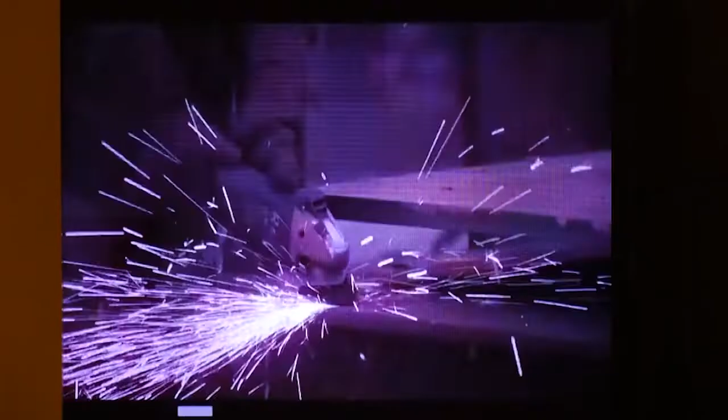Ladies and gentlemen, a very good afternoon to all of you. At the outset, I'd like to express our sincere thanks and gratitude to the management of NHAI and the organizers of this conference for having given us this opportunity to showcase the construction of Bogibeel Bridge, which has been done by HCC over the mighty river Brahmaputra.

Now, as the name signifies, the Brahmaputra, the male river, is ferocious. It is known for its fury, its turbulence, and its floods. In the first session, we saw a devastating video of a flood caused in the Barak River. But to tell the truth, the Brahmaputra is no less than 10 times more furious than the Barak. The design flood at the location where the Bogibeel Bridge has been constructed is estimated to be about 45,000 cubic.

But the question might come that, yes, in the river Ganges in Kolkata, the design flood is somewhere close to 70,000, which has also been observed. Then in what way can the Brahmaputra be considered more ferocious compared to the Ganges? If you see the hydrograph of the Brahmaputra, particularly at the bridge location, you will find that the rising limb lasts hardly 5 hours, whereas for the Ganges it lasts for a period of 12 hours. That indicates the steepness of the rise in the flood.

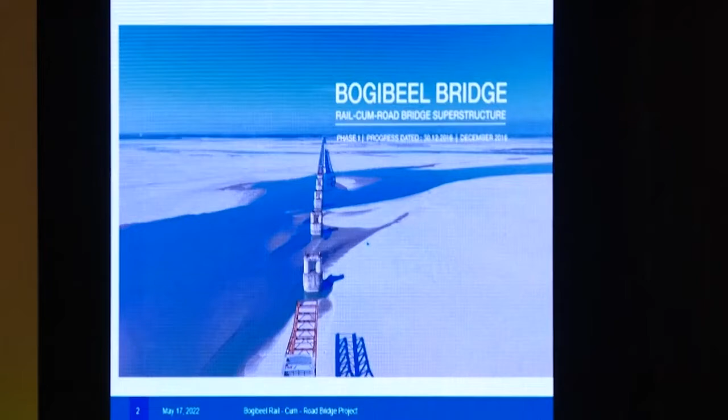At this point of time, I would like to place on record the support and cooperation that we have received from all corners, particularly the Indian Railway, in overcoming all technical and other issues to complete the project in the manner it was expected to be completed. This bridge is special in the sense that it's the first of its kind in India.

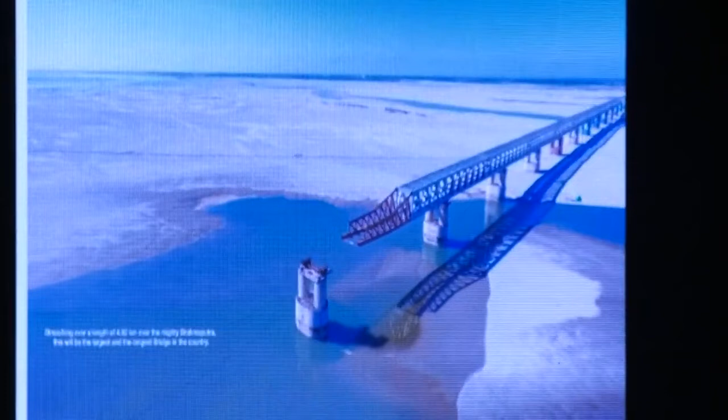It's totally a welded bridge, composite bridge, steel and concrete, and particularly the area receives a lot of rainfall, and therefore the extent of corrosion is likely to be severe. So in order to protect the bridge, to ensure the bridge lives for the design lifetime, corrosion protection measures have to be applied. For this, a special kind of steel with copper bearing had to be employed, apart from other protective measures.

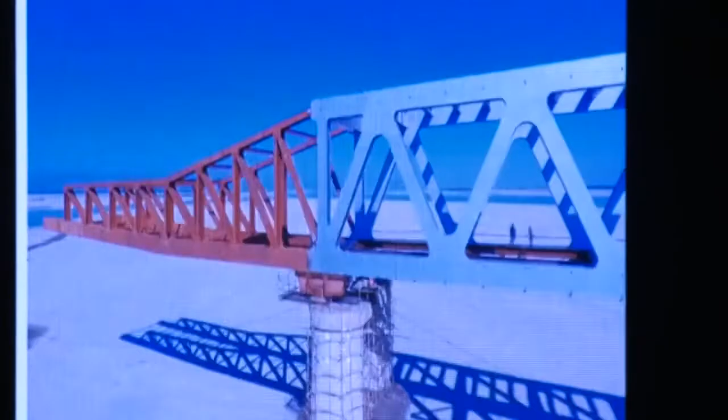Our program of construction was further compounded due to the short working season in the northeastern part of the country, with rains for more than 5 months. Secondly, this area was not having proper infrastructure, it was lacking proper communication, and that was another bottleneck for us to achieve the desired progress.

So the video has already been shown. This is another video which will showcase the method of construction that was used in this process. After completion of this video, I proceed with the presentation.

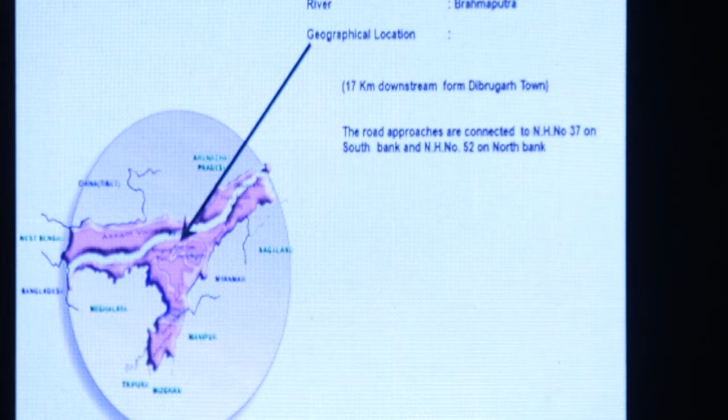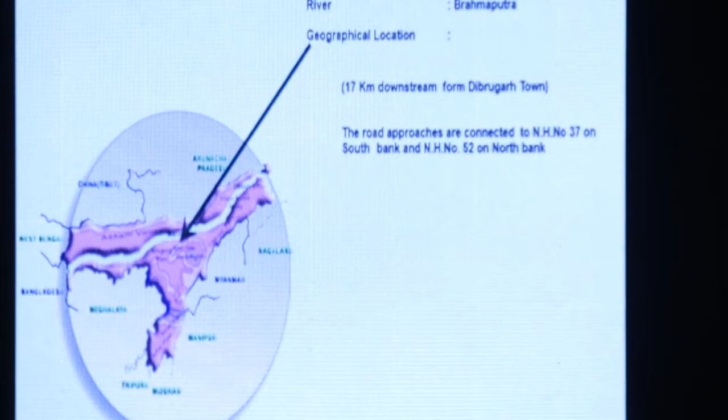Regarding the project location, it is located in the district of Dibrugarh in the state. Yeah, it's already completed and made operational. It's located in the district of Dibrugarh in Assam, at about 17 kilometers downstream of the town, which is about 440 kilometers from the capital city Guwahati.

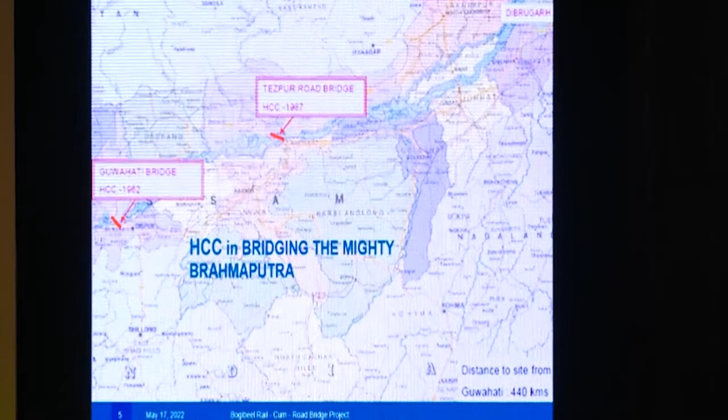Until construction of this bridge, the Brahmaputra River was bridged at 4 locations. 2 bridges were constructed in Guwahati in the name of Saraighat Setu. The second one was Tezpur Road Bridge, which was constructed by HCC in 1987. Then the uppermost bridge is the Bogibeel Bridge. So out of the 5 bridges that have been constructed on this river, 3 have been constructed by HCC, and I take that pride in saying that HCC has been pioneering in bridging Brahmaputra, particularly in the part of Assam.

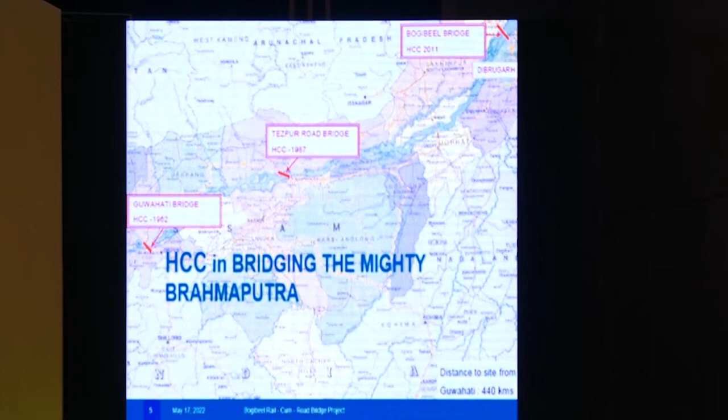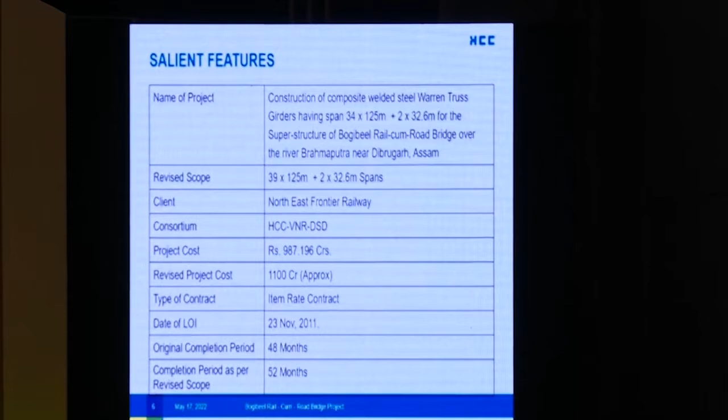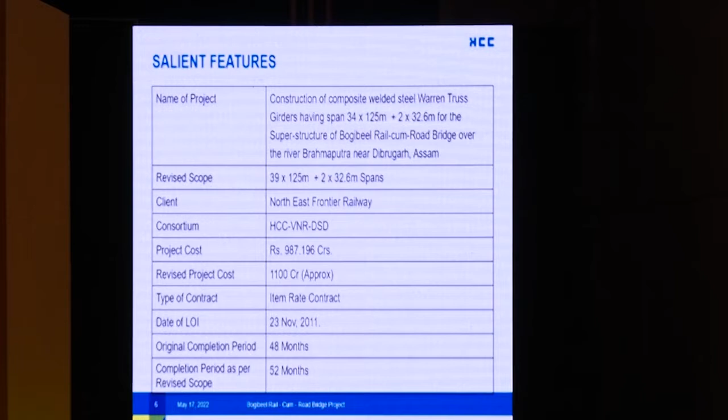Regarding the salient features, the project comprised of providing the superstructures comprising of an original scope of 34 spans of 125 meter each, along with 2 numbers of abutment spans of 32.6 meter. But since the DPR was prepared, the river, because of its immense erosive potential, increased in width, requiring revision in the scope. So 34 spans had to be increased to 39 spans, keeping the span length same as 125 meter.

The client was Northeast Frontier Railway. The work was awarded to HCC, VNR, DSD Consortium at a project cost of 987.196 crores. But because of increase in the span, the revised project cost was estimated to be 1100 crores approximately. The type of contract was an item rate contract. Date of LOI, that is letter of intent, was 23rd of November 2011, with the original completion period of 48 months. But because of increase in the scope of the work, the completion period was extended by another 4 months, that is to 52 months.

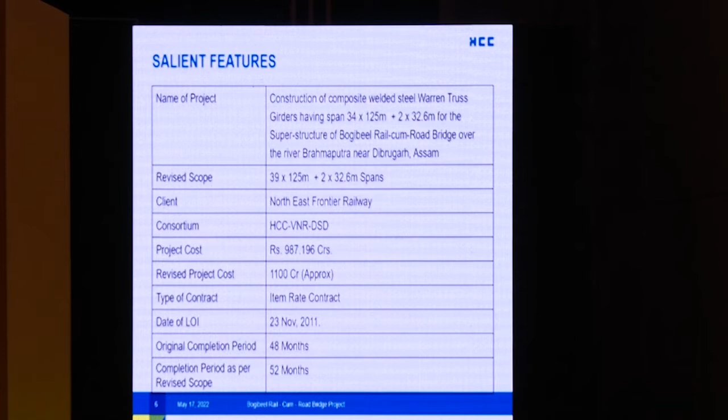The overall length of the bridge was originally estimated to be 4.315 kilometer, and the revised length is 4.94 kilometer. The span arrangement I have already said. The type of superstructure was a composite welded Warren truss girder with road deck at top chord and rail at bottom deck. So this is a bridge of first of its kind in India, a bridge with rail and road constructed over Brahmaputra.

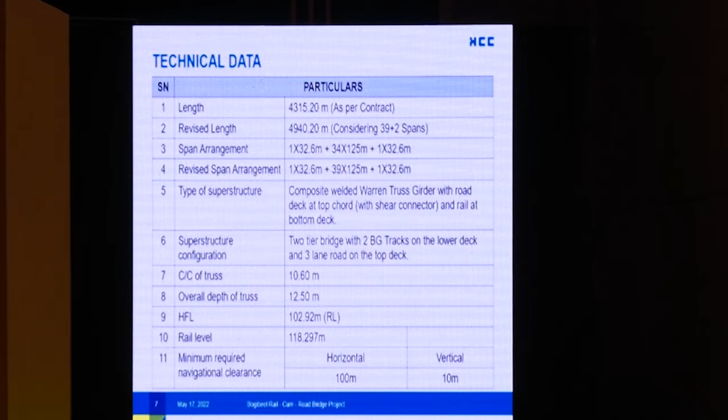The superstructure configuration was a 2-tier bridge with 2 BG tracks on the lower deck and 3-lane road on the top deck. The center to center of the truss was 10.6 meter apart. Overall depth of the truss was 12.5 meter. The HFL at the bridge location was 102.92 meter. As per requirement of navigation clearance, a vertical gap of 10 meter and a horizontal gap of 100 meter is to be maintained. And we have maintained a vertical gap of 15.7 meter, and in place of 100 meter, the span length was given as 125 meters, so well meeting the navigation requirement.

This Bogibeel Bridge project, as I said, is the first time in India of a total welded steel truss girder. India's longest rail-cum-road bridge project. First time in India that Eurocode was followed for bridge construction activities. And first time in India, incremental launching was adopted for such a long bridge. And first time in India, a bridge inspection trolley has been used for future inspection and maintenance.

Now, on the timelines of this project, in the year 1985, the famous Assam Accord was signed between the then Honorable Prime Minister of India, Rajiv Gandhi, and the All Assam Students Union, and the project was approved by the Planning Commission. In the year 1997, the project was sanctioned and the feasibility studies were undertaken by Government of India, followed in 2002 by the foundation stone laid by the Honorable Prime Minister Sri Atal Bihari Vajpayee, and the work commenced. In the year 2007, it was declared a national project.

In the following year, the substructure work commenced. The substructure work was awarded to Messrs. Gammon India Limited. In 2009, the southbank work got completed, followed by completion of the northbank work in the year 2010. And in 2012, after award of LOI to HCC, the superstructure work commenced, and in the year 2014, the first girder was placed.

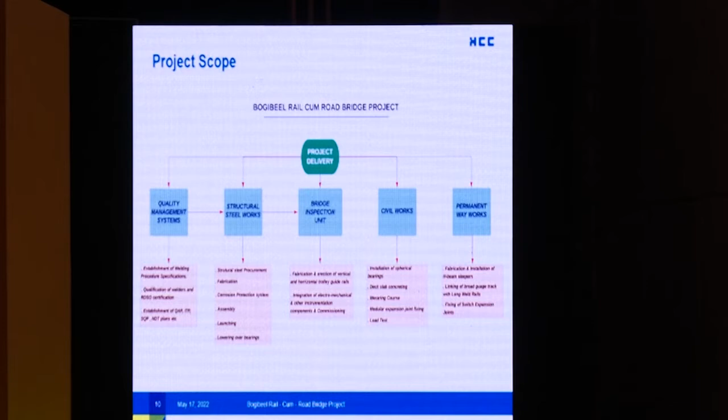Regarding this anti-seismic arrangement, I must tell you that this falls within seismic zone 5 of the Indian seismological map. Therefore, it calls for the design to sustain a value of nothing less than 7.0 on the Richter scale. And this project has been designed for a Richter scale value of 7.2.

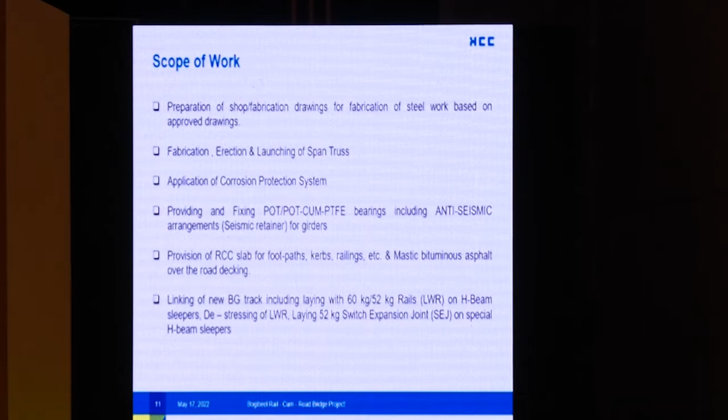Then provision of RCC slab for footpaths, curbs, railings, and mastic bituminous asphalt over the road decking, and linking of new BG track, including laying of 60 kg by 52 kg rails, which are long welded rails on H-beam sleepers, destressing of LWR, laying 52 kg switch expansion joint on special H-beam sleepers.

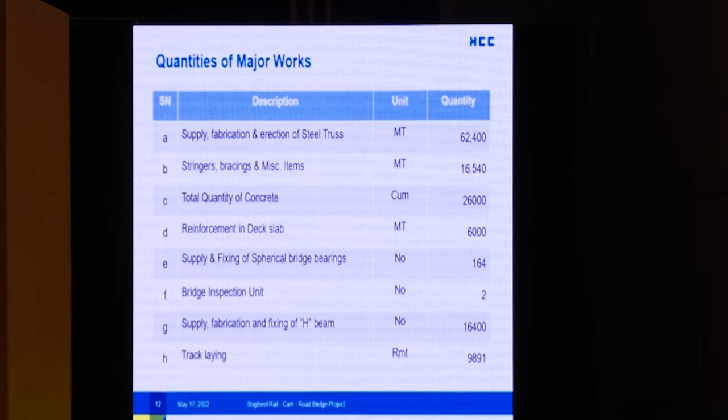Now, quantity of major works: basically it is a steel bridge. So you may see that the bridge involved about 62,400 of supply, fabrication and erection of steel trusses, then stringers, bracings and other miscellaneous items accounted for 16,540. So in totality, this is giving about 80,000 of steel material to be handled for the project.

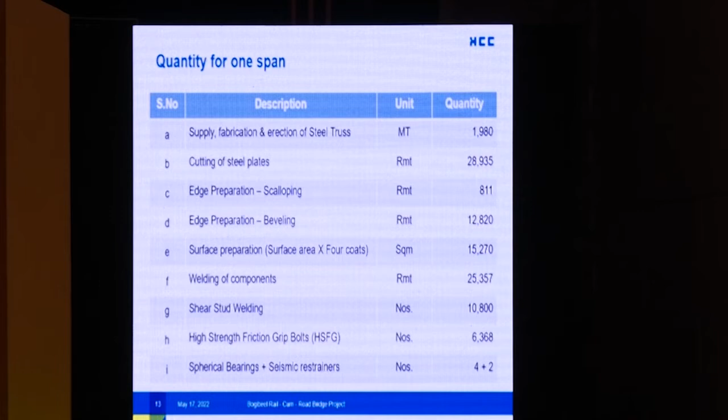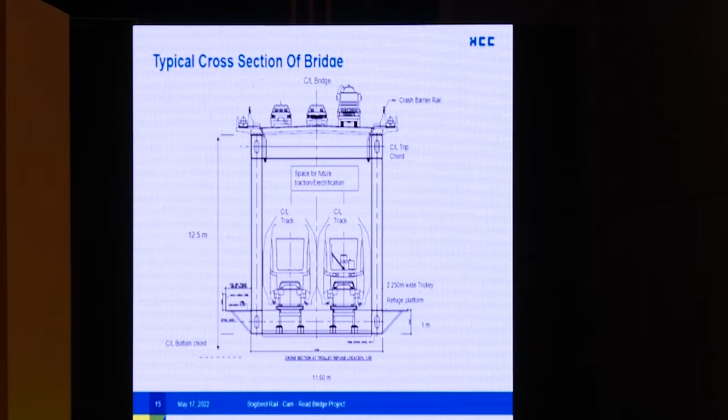And the typical cross section of the bridge, you may see that the bottom width is 11.6 meter and the top height is 12.5 meter. The major equipment which were deployed for fabrication purpose are 4 overhead gantry cranes of 20 ton capacity, deployed at 2 different bays in the fabrication workshop.

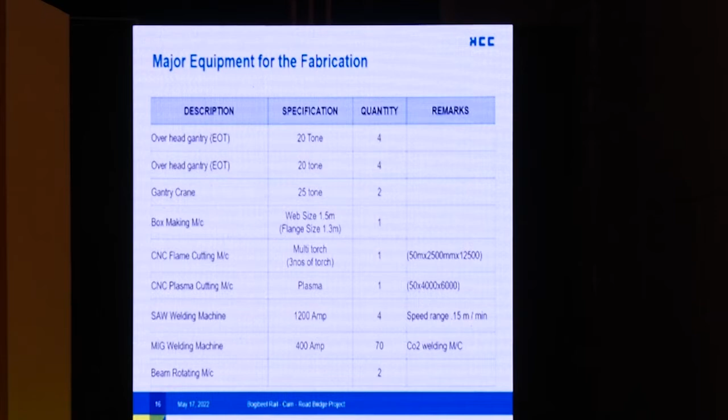Quantities were 8 numbers, and 2 numbers of 25 ton gantry cranes were deployed, apart from other machineries like box making machine, CNC flame cutting machine, CNC plasma cutting machine, then submerged arc welding machine, then metal inert gas welding machine, beam rotating machine, etc. So these are all other equipments which had to be incorporated in the process.

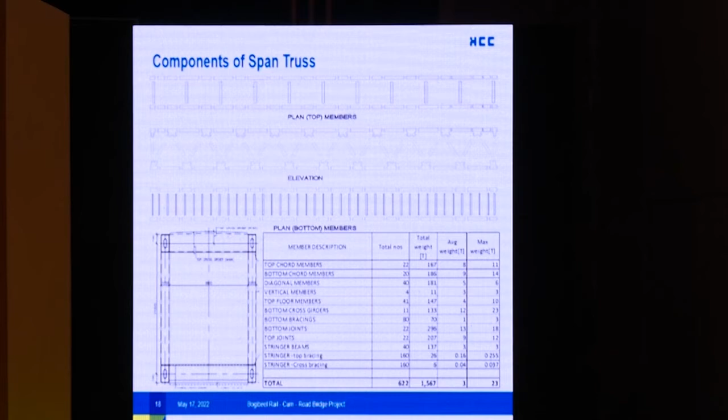Now regarding the components of the span truss, you'll see that it comprises of top chord members, bottom chord members, diagonal members, vertical members, top floor members, again bottom cross girders, bottom cross bracings, bottom cross joints, top joints, stringers, and stringer cross bracings. So this is fabrication of component.

The first one is the top chord and bottom chord members are box sections with box dimension of 1 meter by 1.5 meter. And total contribution of this box into the entire assembly is about 21%. Then diagonals and vertical members are also box sections with box dimension of 1.1 meter by 1 meter, and they accounted for 11% of the total tonnage.

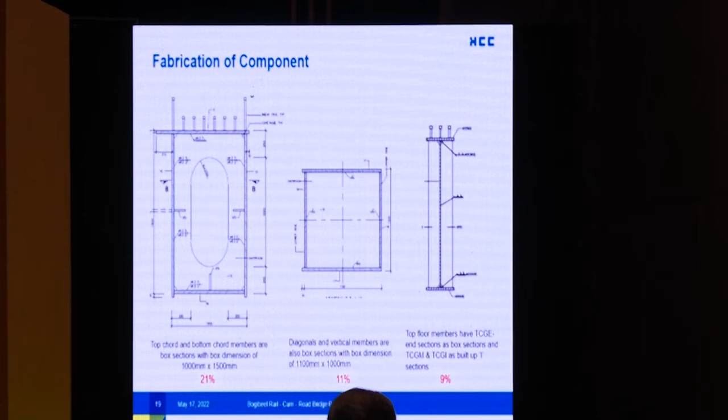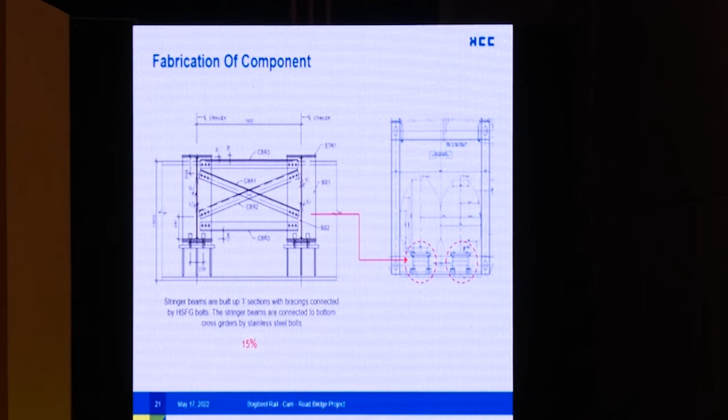So we had developed a fabrication workshop just near to the site. Before I go into this, I must tell you some background. Initially, when the project was awarded to HCC, the planning was that work will be continued from 2 different banks of the river, that is from the north bank and from the south bank. And that would require us handling of 5 trusses at a time through 1 train, which would require us to handle about 8,500 MT of steel materials.

But then when we had taken the recce after award of work, we have seen that these 2 banks are so distantly connected with each other that we will be required to move about 350 kilometers to reach the other bank unless we use a ferry. So that would require us to set up two independent units, and these are to be viewed as two independent projects.

But then the time period was very short, so we started thinking what best can be done. So literature reviews were done, a lot of research activities were taken up, and then we could come to know that there are some bridges in China and some bridges in Germany which have been built with handling of more than 15,000 MT of steel. So that had given us some idea: why can't we bring that technology to India and handle, say, 10 trusses at a time, 10 spans at a time, which would require handling of 17,000 tons of steel.

So our people, along with officers from Indian Railways and other consultants, had gone to Germany, tried to gather information, tried to visit the bridges which have been built with such a massive involvement of steel at a time, and the technology was transferred. And that is how ultimately it was decided that we shall be taking up the work only from one bank rather than concentrating on two banks. And that had required a massive handling of 17,000 tons of steel per train at a time.

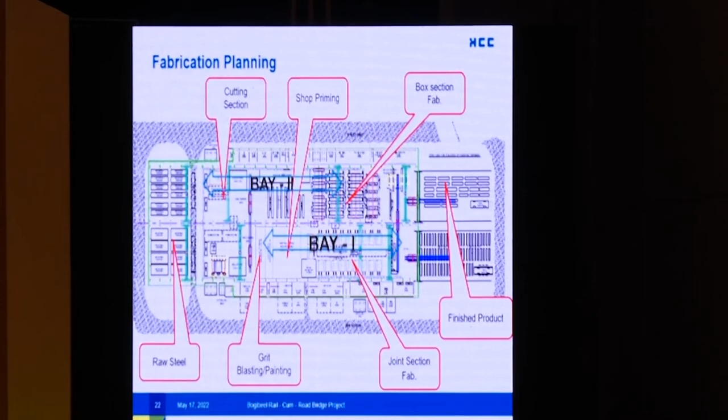So for that, the fabrication planning had to be very robust. So we had set up two bays, bay number 1 and bay number 2, to handle all these activities. This gives you a layout of our fabrication workshop. You'll see that both the bays have been marked. So here the activities are basically receipt of raw steel, followed by cutting section, then box fabrication, joint section fabrication, then grit blasting, painting, and shop priming, after which the materials were made ready as a finished product, ready for transportation and to be placed at site.

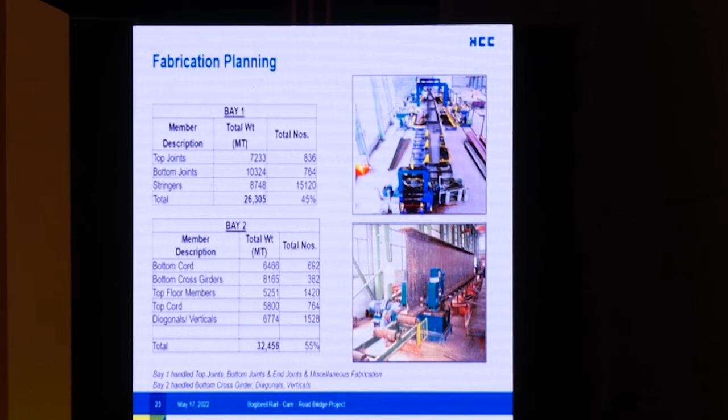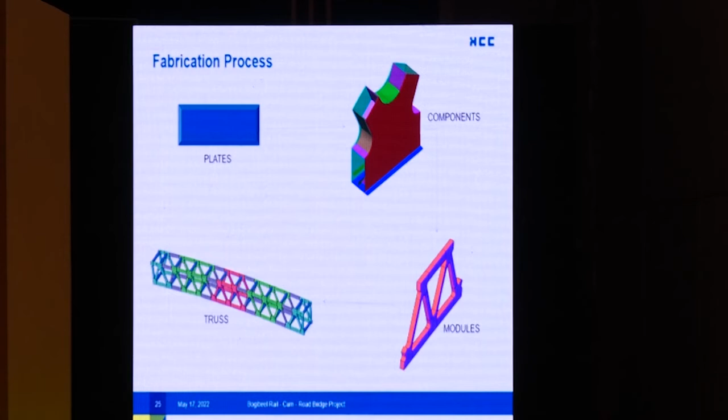So regarding fabrication planning, you'll see that in Bay 1 we handled about 26,305 MT of steel materials, which accounted for 45% of the total requirement, while in Bay 2 we handled about 32,456, so totaling about 58,000 MT of steel, which were managed from this workshop. So this is a flowchart of fabrication which is known to each and everyone. This is a standard process. We did not do anything special in this. The fabrication process is basically receipt of plates, then making the components, then making the modules, and these modules are assembled together to form the truss. That is how the system was continued.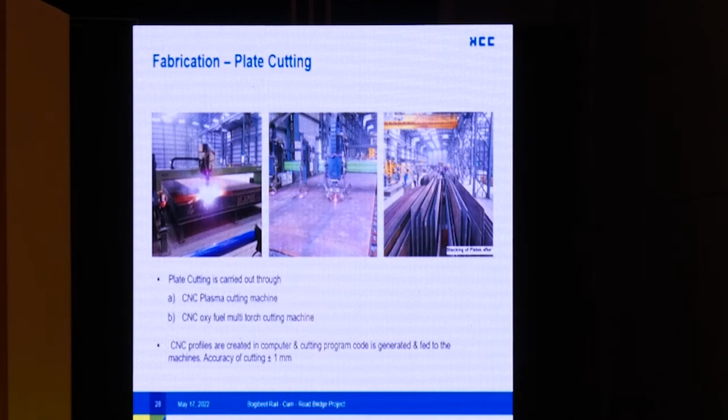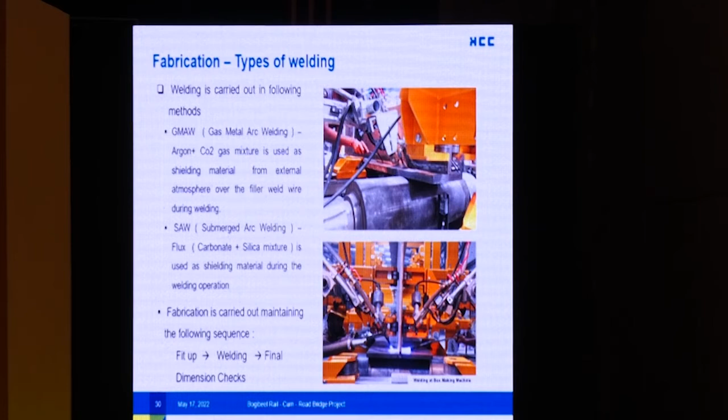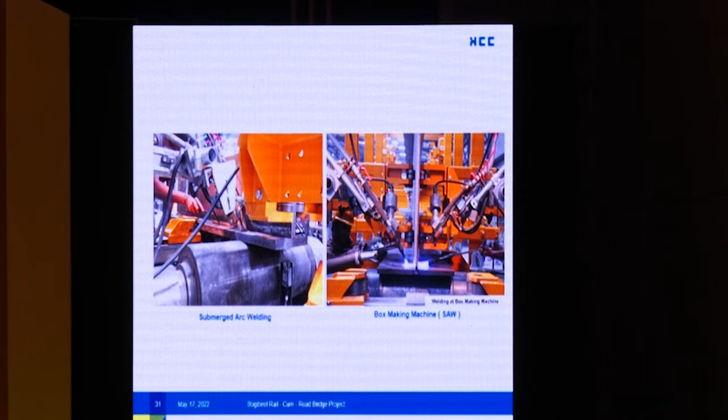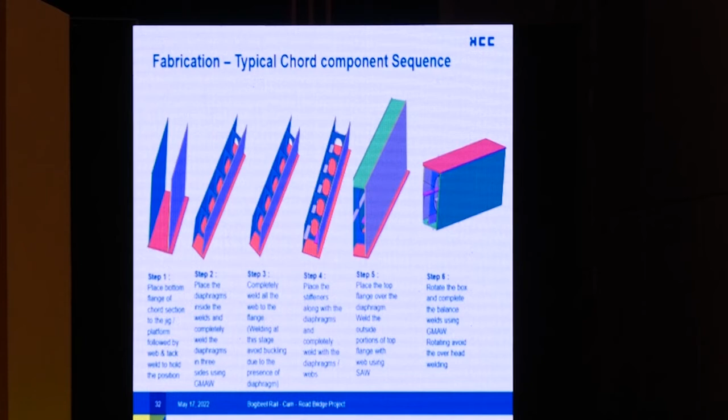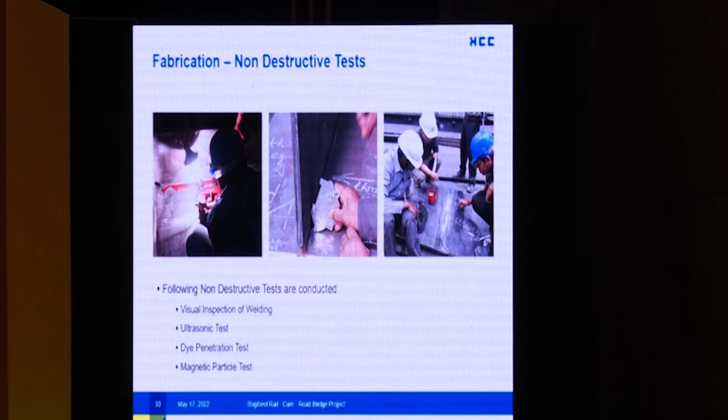And welding was carried out by the following methods: one is GMAW, that is gas metal arc welding, and another is submerged arc welding. And fabrication was carried out maintaining the following sequence: fit up, welding, then final dimension checks. This is a view of submerged arc welding being done, and the box making machine. So this is a typical procedure that we followed during the fabrication process. Non-destructive tests were carried out to ascertain that the welding done is up to the mark and meets the specification without leaving any gaps or cracks, which might create problems during the maintenance period as well as during the assembling period.

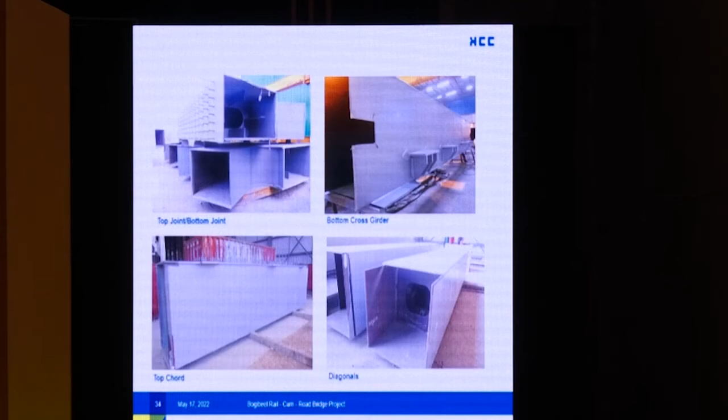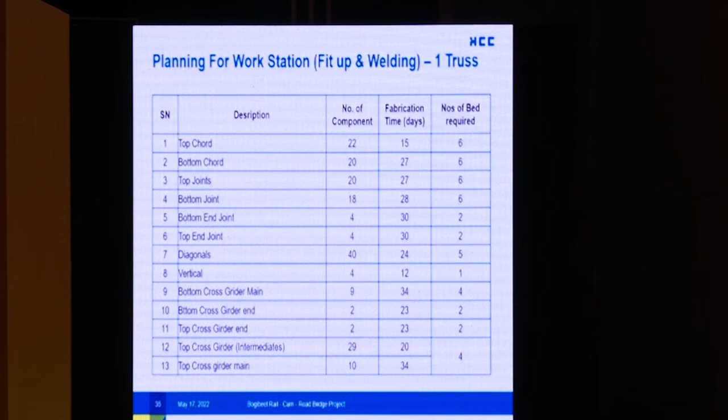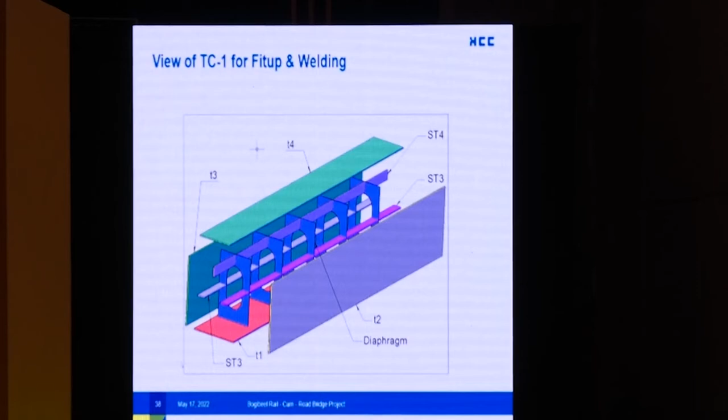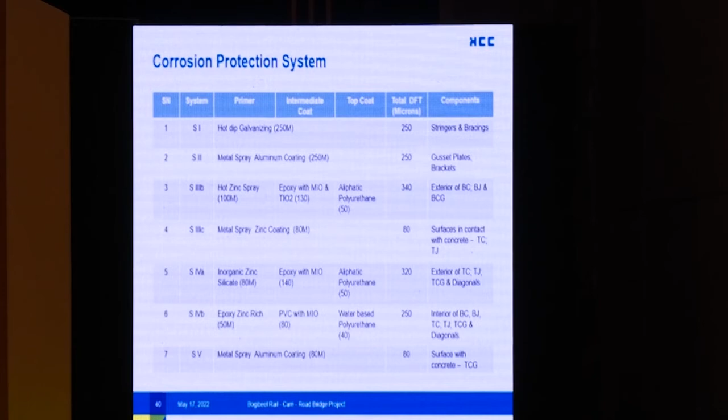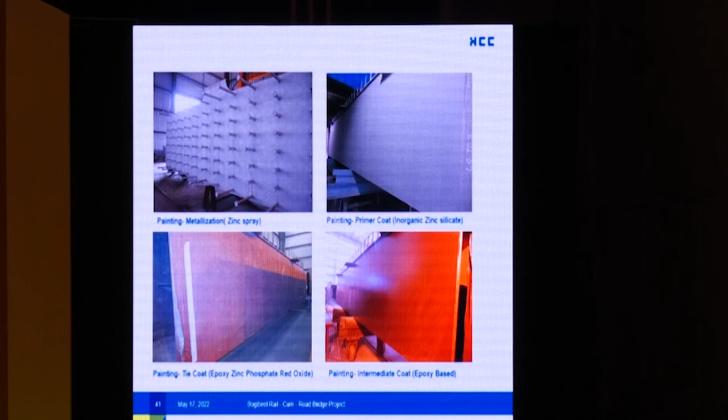The corrosion protection system: as I said, this area falls in the severe corrosion zone, which requires that a proper corrosion protection system has to be applied. So there are about 7 different processes that have to be applied in order to make it anti-corrosive, so that the design life can be assured. And as a matter of fact, the project has been running, and corrosion damage has been observed and measured, and it has been found very, very satisfactory.

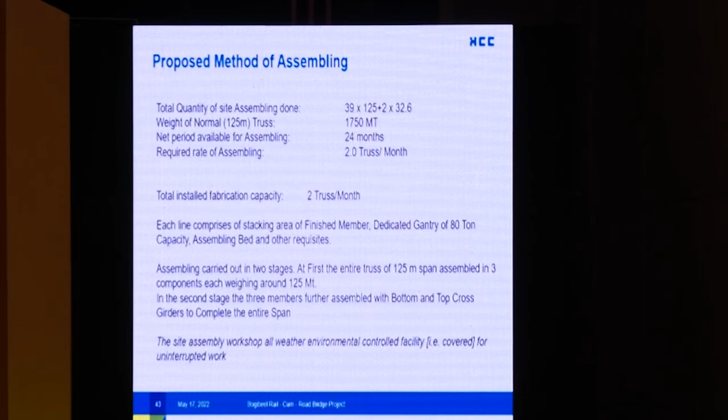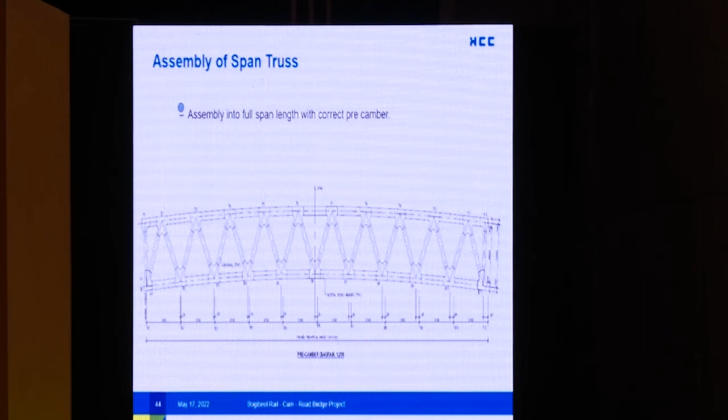Then the proposed method of assembling: it required basically 39 spans of 125 meters and 2 abutment spans of 32.6 meters, and the weight of a normal 125 meter truss was about 1750 MT, and the net period available for assembling was 24 months, which means the required rate of assembling was 2 trusses per month. So that was a horrendous, Herculean task, but with the help of everyone, we could come up to the expectation of Indian Railways. Then assembly of truss spans into the full span length with correct precamber. This gives you a view of this. And the proposed method of assembling, which was actually followed at site, was composed of 5 different parts, and these parts have been shown in different colors.

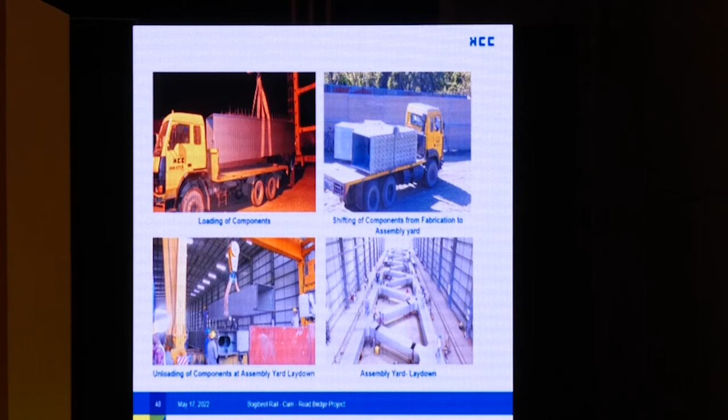So here are some of the photographs which were taken during execution of this project.

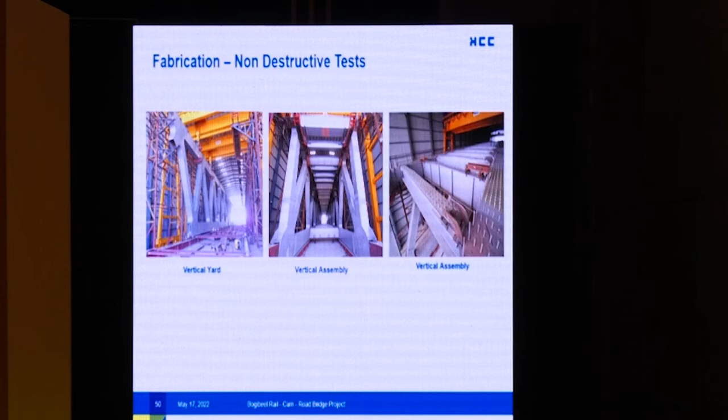Now, methodology of launching - as I said, that was the most daring challenge for us - how to handle 17,000 MT of steel at a time in a train comprising 10 different trusses.

Launching was carried out in four launching segments, truss trains. First 3 segments consist of 10 spans of 125 meters each, while the fourth consists of 9 spans of 125 meters. The first and last spans of each launching segment are end spans, while the remaining are normal spans.

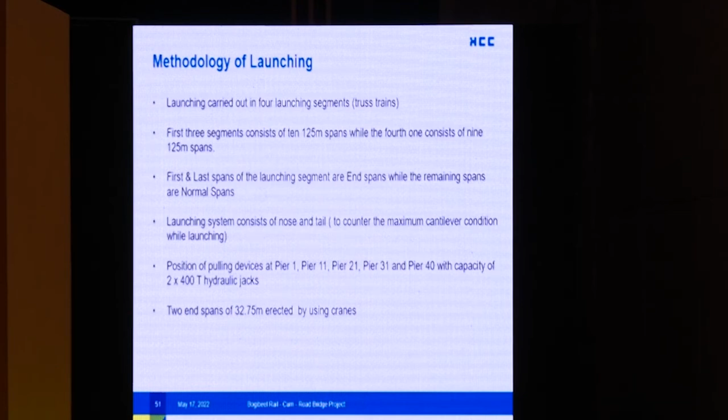Launching system consists of nose and tail to counter the maximum cantilever condition while launching. Position of pulling devices at pier number 1, pier number 11, pier number 21 and 31, and pier number 40, with capacity of 2 numbers of 400-ton hydraulic jacks. 2 end spans were also required.

So this is the launching sequence. You'll see the first sequence is of 10 spans with 125 meter length, again 10 spans of 125 meter length, and 10 spans followed by 9 spans, as I mentioned in my first slide.

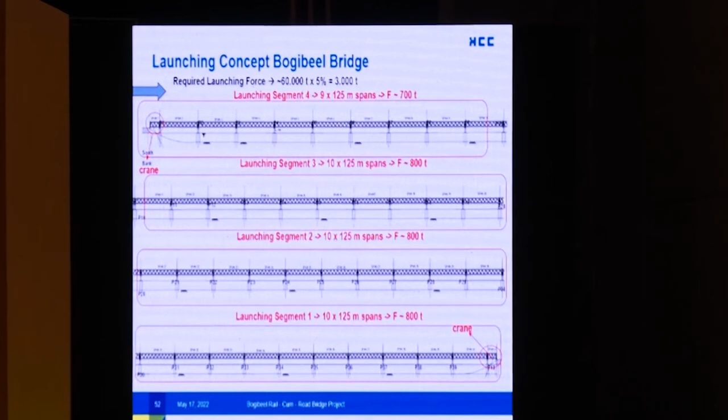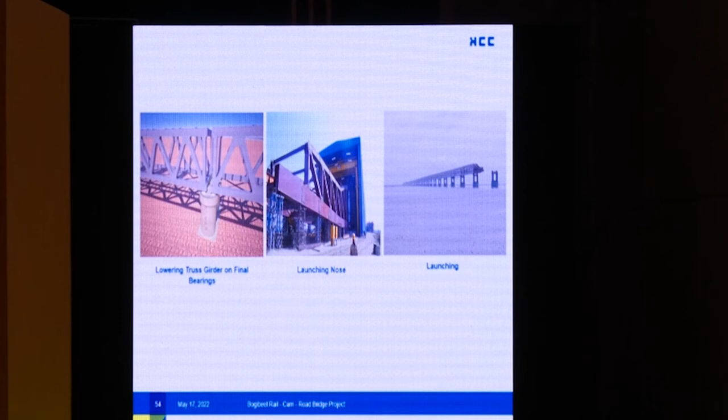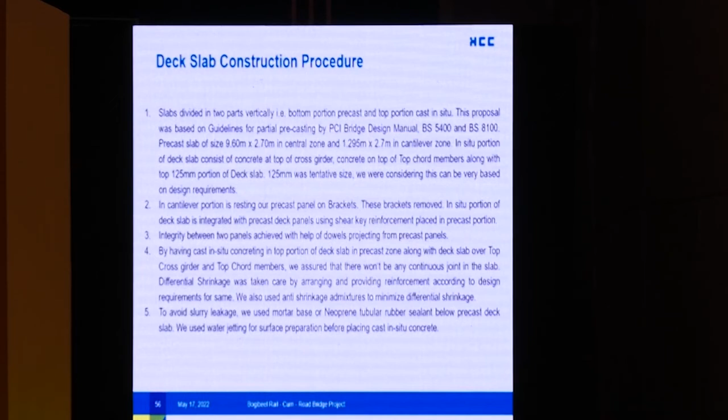Precast slab of size 9.6 meter by 2.7 meter in the central zone, and 1.295 meter by 2.7 meter in the cantilever zone. In situ portion of deck slab consists of concrete at top of cross girder and concrete on top of top chord members, along with top 125 mm portion of deck slab. 125 mm was a tentative size - we were considering this could be based on design requirements, but ultimately this is what was followed during construction.

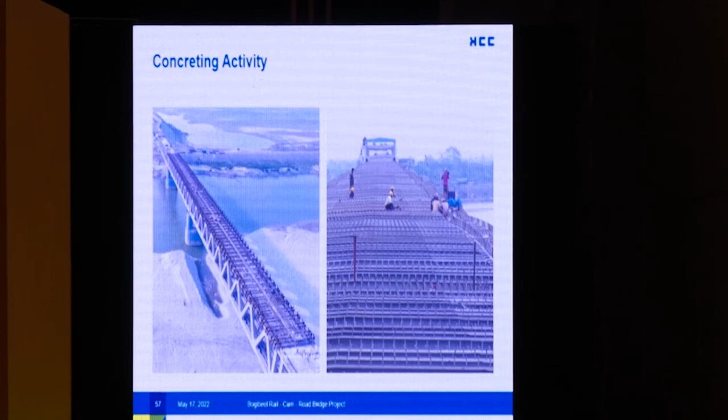Then on the concreting activity, some photographs taken during that time are placed here for your view. Then H-beam sleeper fixing of lower spans.

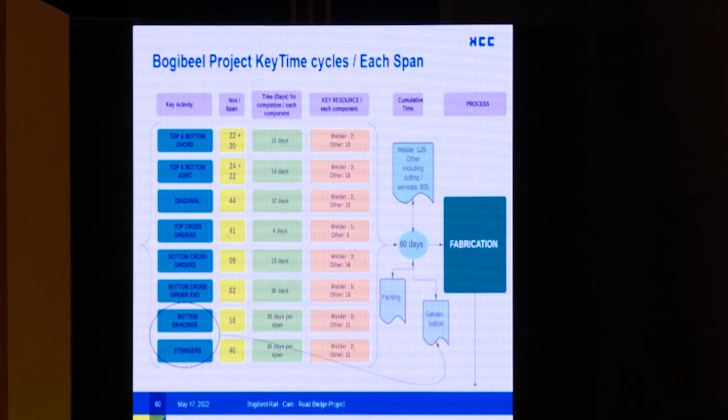Now, Bogibeel project key time cycles for each span - you'll see from this slide that the fabrication activity took about 60 days, followed by another 40 days for galvanization and other anti-corrosion measures application. And assembly took about 50 days.

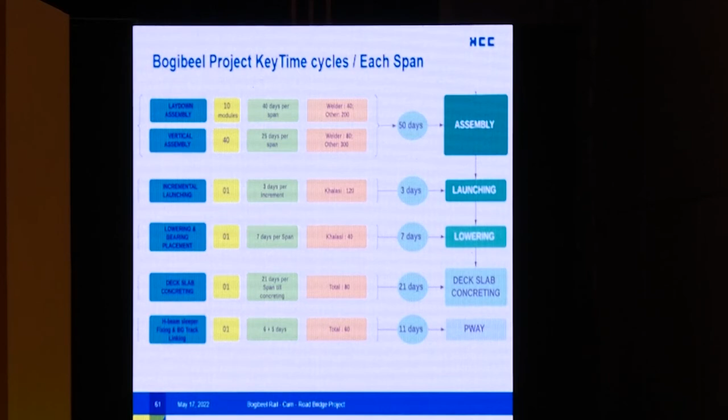But for launching, which we were afraid might take a lot of time, this work could be completed in a pretty small period - 3 days, and 7 days of lowering. So in 10 days, practically, we could lower and make it ready.

So other major technical aspects of the bridge are the bridge inspection trolley. As I said, 2 numbers of trolleys on either side of the bridge for regular inspection and maintenance have been provided. This is the first time such an arrangement has been given in any road bridge in the country.

Then spherical bearings - total about 164 numbers of spherical bearings were imported from abroad, with capacity of 29,000 kilonewton for the 125 meter span and 8,400 kilonewton for the end spans. Before commissioning of the bridge and bearings, load test was conducted at the only capable test facility in the world, at Tongji, Shanghai.

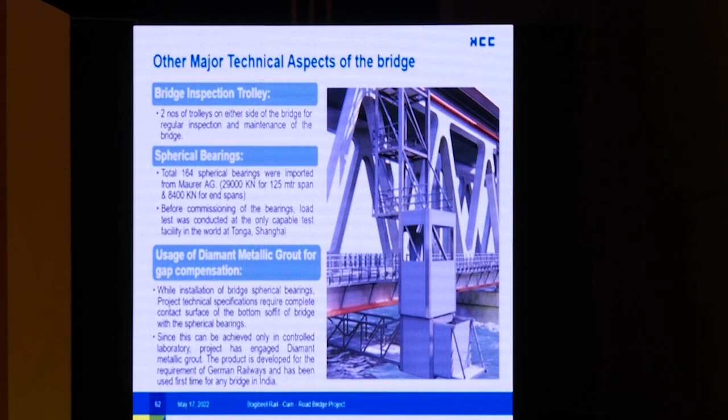This project was inaugurated by the Honorable Prime Minister of India, Shri Narendra Modi ji, on 25th of December, and dedicated to the nation. Since then, the bridge has been serving enormously, meeting the expectations of the people. The support extended by the Indian Railways and the dedicated effort of the officers and staff helped immensely in completing this challenging task.

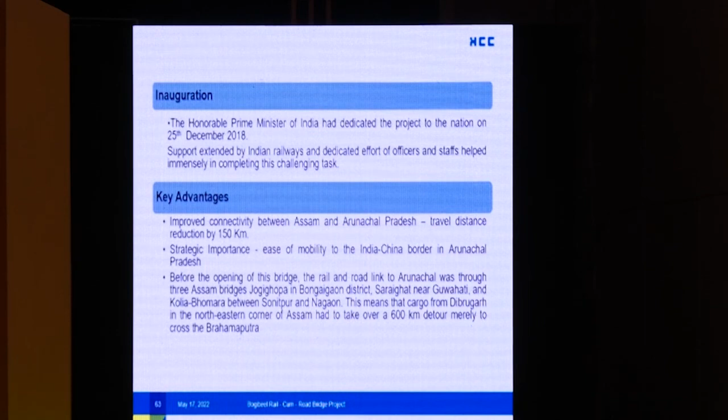The key advantages, as already mentioned in the first video - the travel distance between Assam and Arunachal Pradesh has been reduced by 150 kilometers, and the bridge is of strategic importance, easing mobility to the Indo-China border near Tibet in Arunachal Pradesh. This is of strategic importance as materials, arms, ammunition and other things can now be carried very easily, which otherwise would have required 18 hours of additional journey from the banks of Assam. So with this, I conclude this presentation.